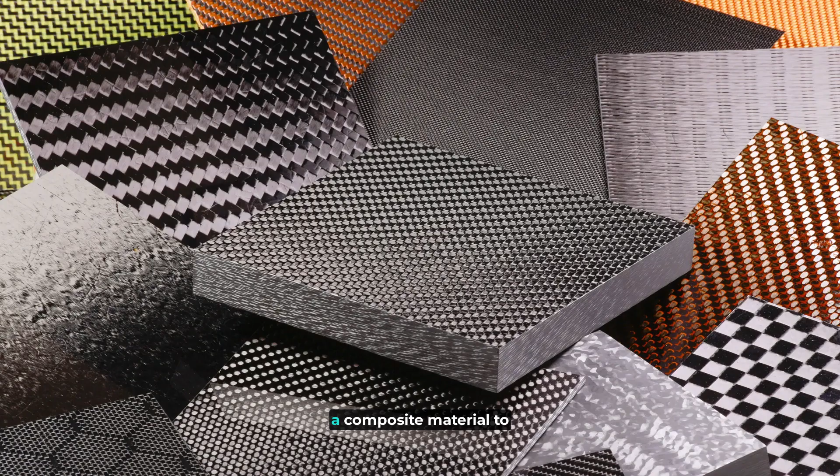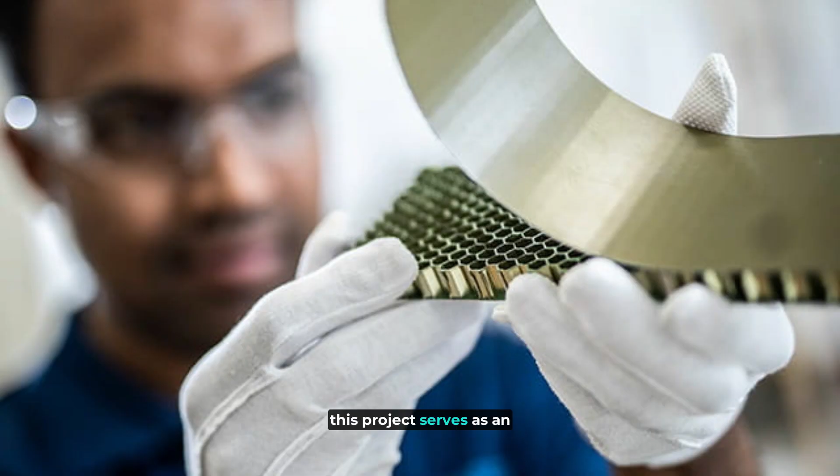The primary goal is to use a composite material to manufacture a bumper which can withstand the frequent impacts the vehicle may experience, that being by elastically deforming and returning to its original shape without any permanent damage. Furthermore, this project serves as an exploration of composite materials and manufacturing methods in the pursuit of a technology which will permit the critical function of the product for the customer while also enhancing technologies currently in use.

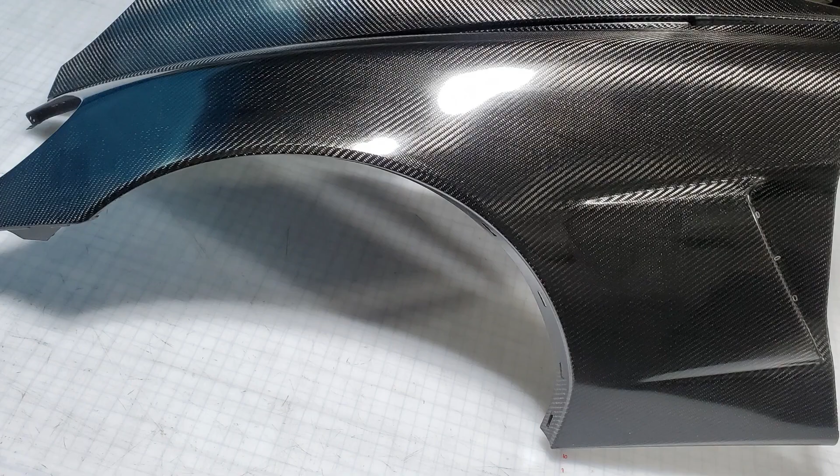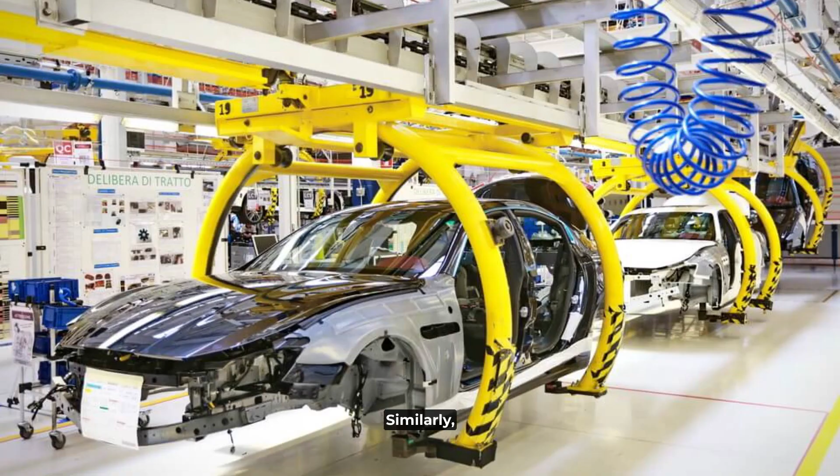Carbon fiber car panels are essential in motorsports for their lightweight, strength, and durability. They improve vehicle performance by reducing weight, enhancing handling, and increasing fuel efficiency. These panels also offer impact resistance, ensuring driver safety and lowering maintenance costs. Similarly, within the automotive industry for commercial applications, they reduce permanent deformations due to small-scale impacts that would otherwise require expensive and labor-intensive repairs.

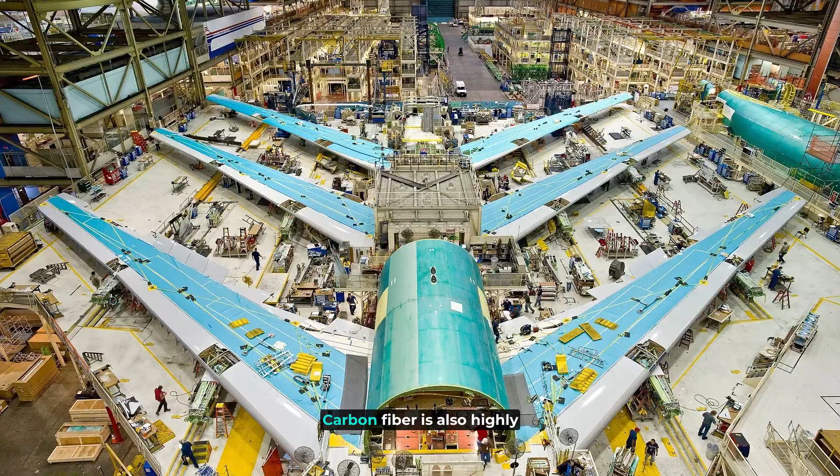Carbon fiber is also highly beneficial to aeronautical and aerospace implications due to its exceptional strength and lightweight properties. These advanced materials enable significant weight reductions in aircraft and spacecraft structures, enhancing fuel efficiency and performance. Additionally, carbon fiber's durability and resistance to corrosion make it ideal for withstanding the extreme conditions of space and high altitudes. Its versatility allows engineers to design sleeker and more aerodynamic shapes, optimizing the overall efficiency and safety of these vehicles.

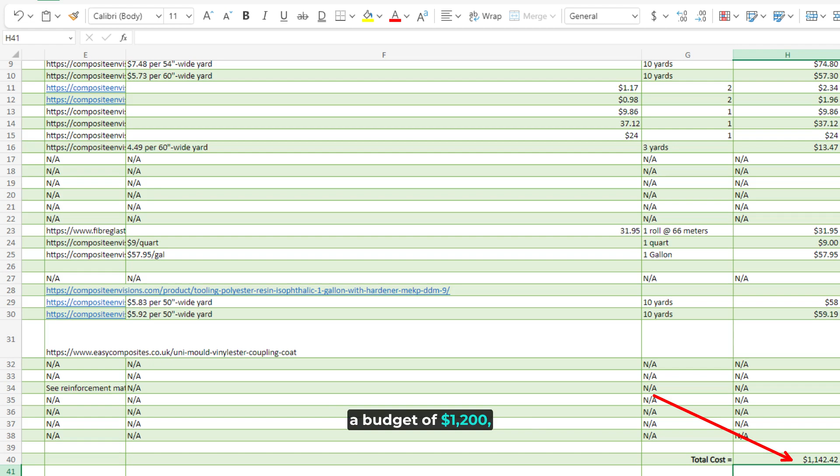A major roadblock for this project was budget. Originally, we were quoted to have a budget of $1,200, but were only initially approved for $600, which was then bumped up to $800. Because of this, the team was forced to pivot multiple times on the manufacturing approach.

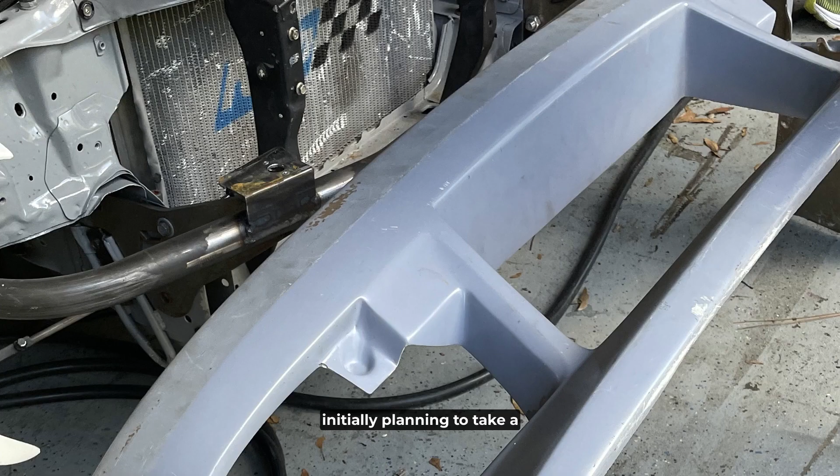Initially, planning to take a direct offset mold using carbon Kevlar. After the initial approval came through, the team settled on an offset mold using carbon fiber, and when the budget was increased, a 3D printed mold using carbon fiber.

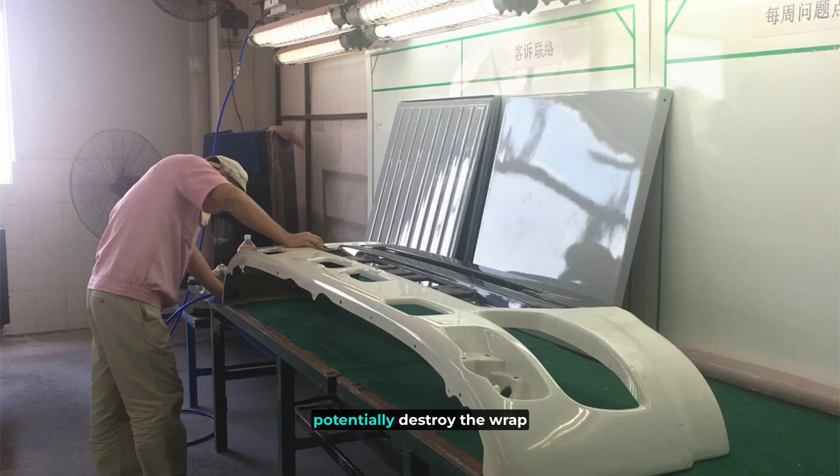One of the major setbacks that delayed the bumper's completion was that the car was being sent to a shop to get vinyl wrapped, to match the overall aesthetic of being a UCF-oriented engineering project. However, this led to schedule conflicts between the team and the car's availability to get 3D scanned. Furthermore, we realized that we could potentially destroy the wrap with the surface treatment necessary to make the offset mold.

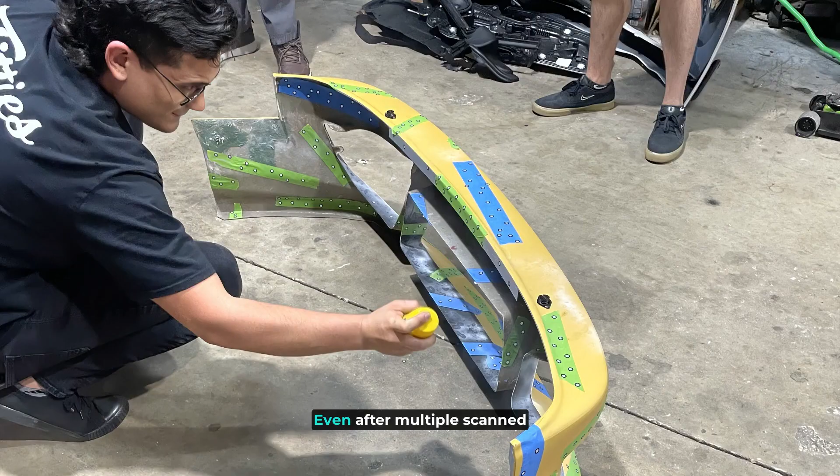Another major setback was acquiring a usable 3D scan to create a mold and conduct finite element analysis, commonly known as FEA. Even after multiple scan attempts using a Creality CR Scan Lizard and an Einstar scanner, we were not able to capture a complete scan of the bumper. However, we were able to manually recreate the bumper in CAD, which we were able to use for 3D printing and FEA.

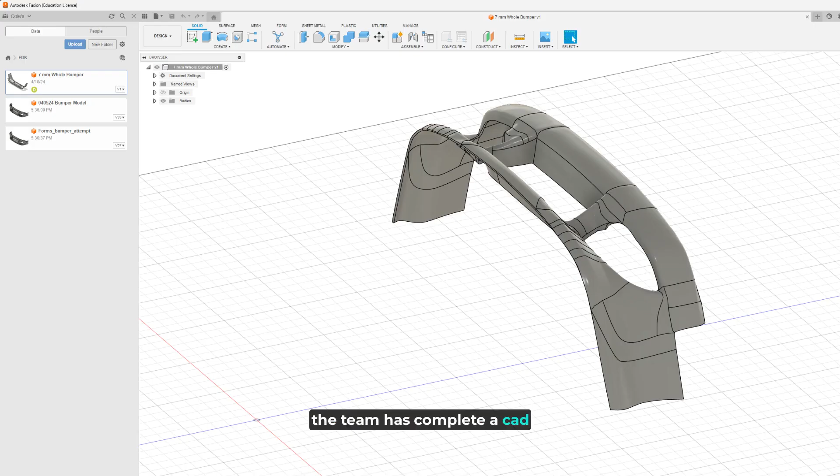Throughout the project, the team has made many significant achievements and accomplishments. Firstly, the team has completed a CAD model of the bumper. This was achieved by taking a 3D scan of an existing bumper and then creating segments and surfaces from the scan to have a complete model.

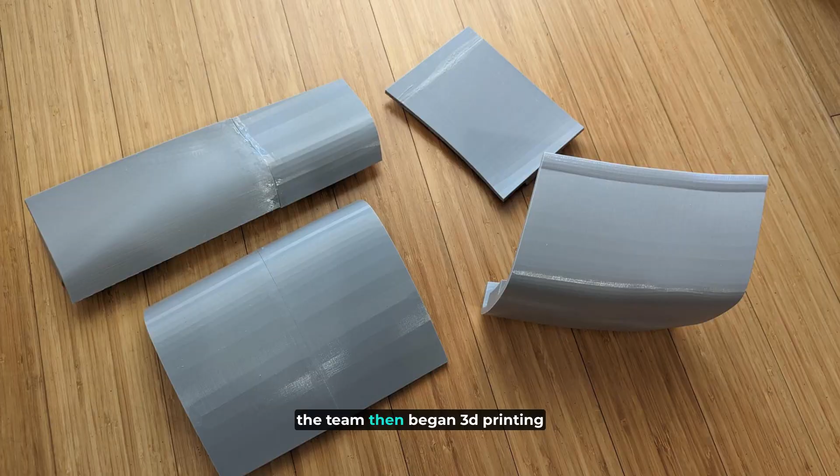From this model, the team completed the mold design of the bumper, which could then be 3D printed. Prior to the printing process, the team acquired all material required to complete the mold and the bumper through submitting purchase forms and checkout forms. With this material, the team then began 3D printing the mold and also made some coupons for tensile and flexural material testing.

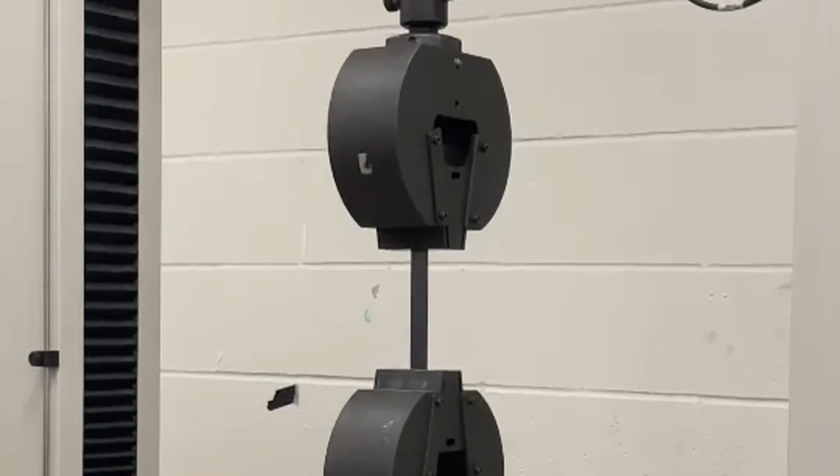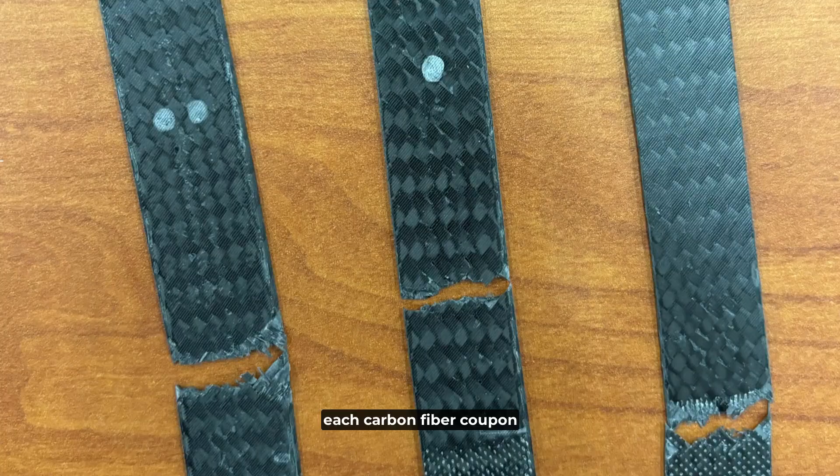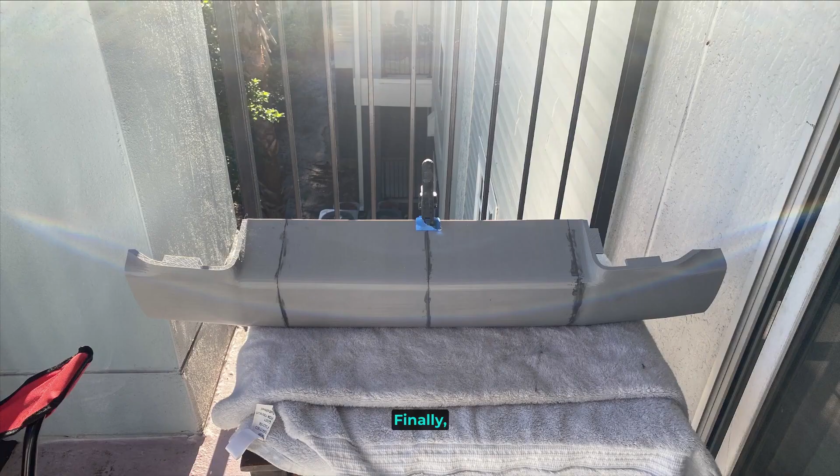Each carbon fiber coupon was tested in Dr. Gou's lab, and with the data found from testing, finite element analysis could be performed by the team on the bumper model. Finally, the team has started piecing together the 3D printed mold sections, which once complete, will be used to create the bumper.